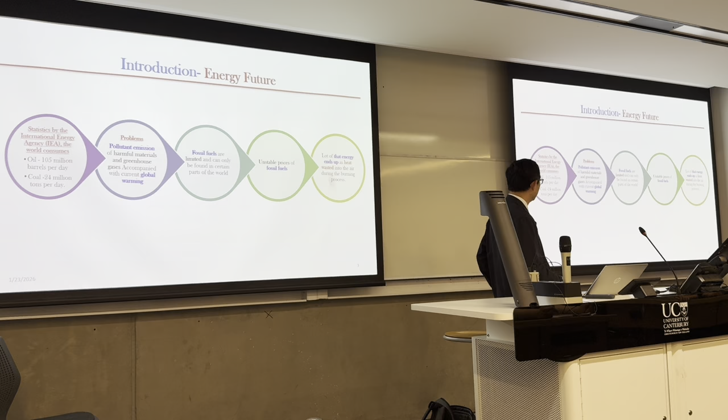So now fossil fuels are limited. How can we find new energy? There's also the unstable price of fossil fuels, and a lot of energy ends up wasted as heat, contributing to global warming. So during this period of time, how can we find future energy?

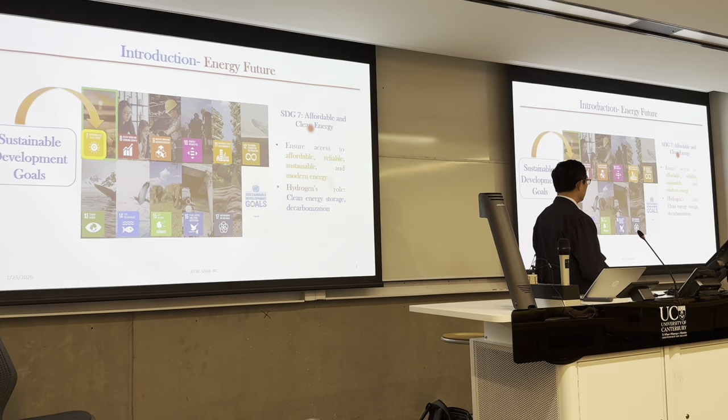As you know, the Sustainable Development Goals—SDG 7—should be affordable and clean energy. Not only clean energy, but also affordable, not very expensive, so we can afford such new clean energy. This goal ensures access to affordable, reliable, sustainable, and modern energy.

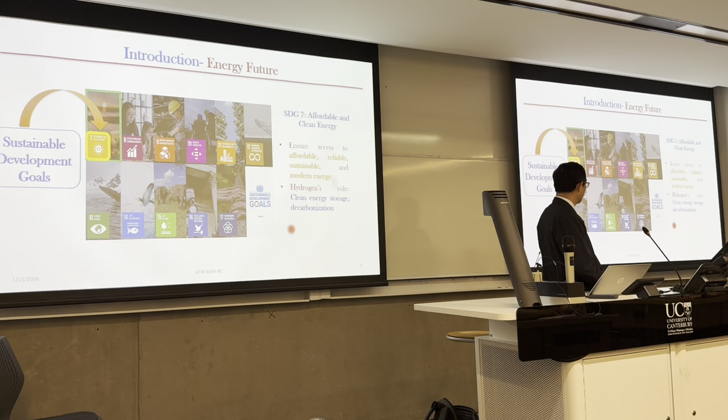So hydrogen is one of the best choices. Hydrogen is clean energy storage, and also enables decarbonization through hydrogen energy.

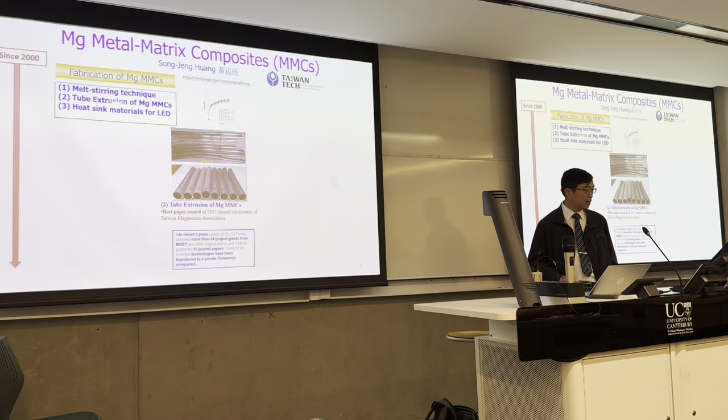Actually, from my PhD research, I did a lot of metal matrix composite materials, basically based on magnesium metal matrix composite. We can melt those and make composite material by melt stirring technique. We can also make extrusion of magnesium alloy to make tubes for bike and scooter joints. We also did some heat sink material from magnesium metal matrix composite materials.

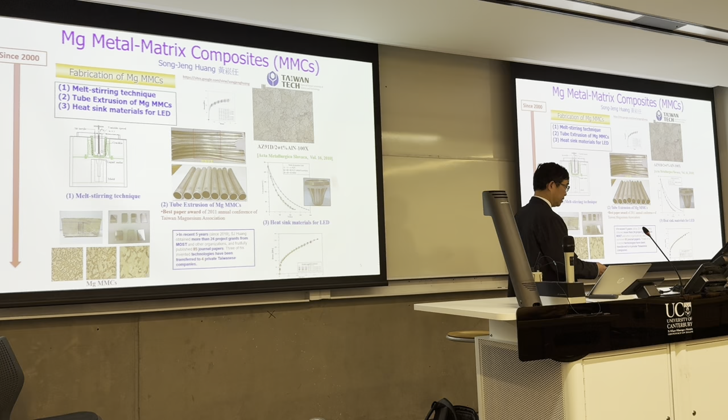That was about 20 years ago when I started this research. I studied in Russia, where we have a special processing technique called ECAP—Equal Channel Angular Pressing—that can make the material tougher and with more strength through this process.

Besides studying metal matrix composite materials, we also synthesized tungsten disulfide nanotubes, which can enhance the properties of metal matrix composite material. From this research, we also filed some patents and licensed them to industrial companies.

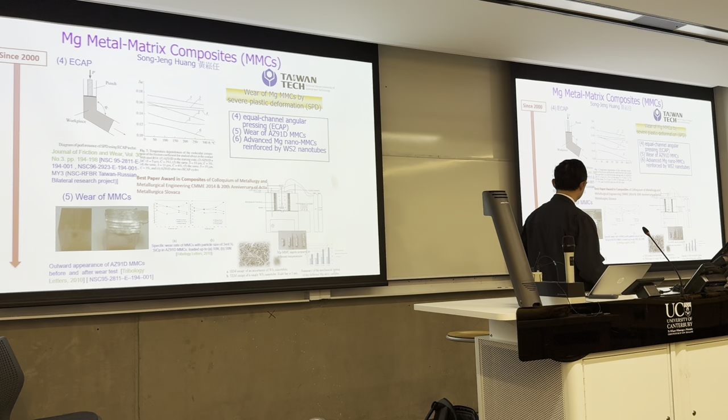It was 12 years ago when I visited Israel's Weizmann Institute of Science. I started thinking about how I could apply magnesium metal matrix composite material to storage, especially hydrogen storage. We also studied some micro-arc oxidation, especially for magnesium alloy.

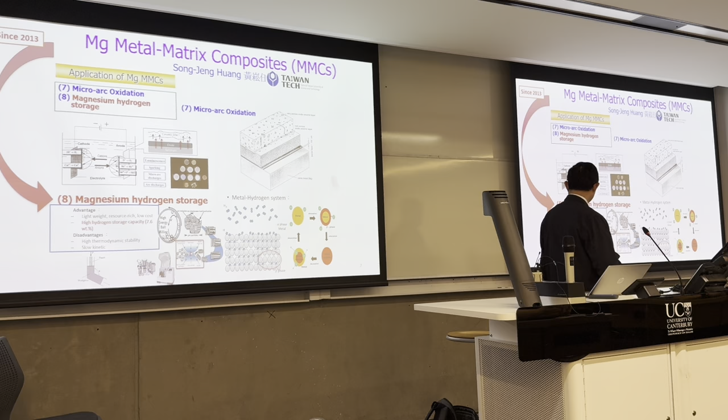So why do we focus on magnesium hydrogen storage? Because it's very interesting—magnesium is lightweight, very light, and also resource-rich, low cost. More interesting is that it has the highest storage capacity, 7.6%, the highest among all metal elements. But it has the disadvantage of high thermodynamic stability and slow kinetics. So we need to overcome every disadvantage of these materials.

Why do we use hydrogen and magnesium as a hydrogen carrier for storage? Actually, hydrogen is the simplest and most abundant element, as you know. Magnesium is also abundant on earth, and hydrogen is also a very abundant element. So it's an energy carrier, not an energy source, but an energy carrier—we can deliver and store more energy.

For example, in Taiwan we have a lot of solar energy and wind energy, but we cannot keep the solar energy for a long time—we cannot save it. But if we transfer such electricity to produce hydrogen, we can store the hydrogen for a long time—1 week, 1 month, 1 year. Then when we want to use that energy, we can transfer the hydrogen back to electricity. So hydrogen is a very good energy carrier.

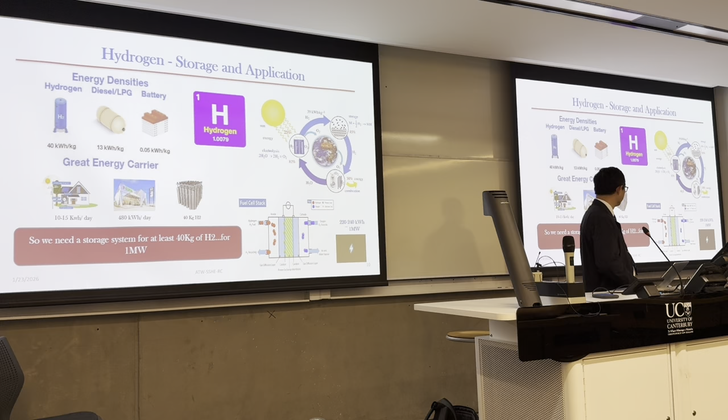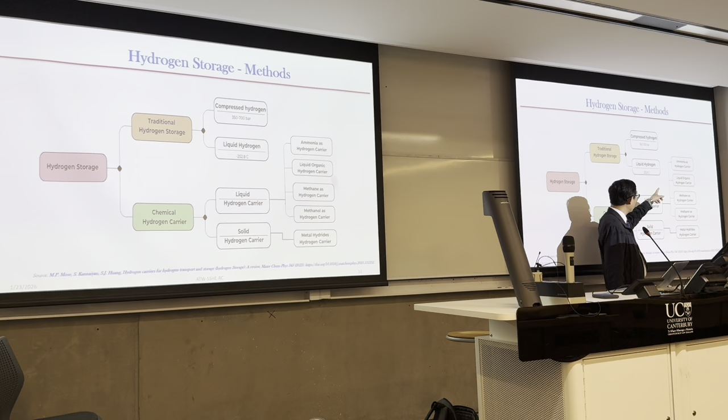Another category of storage method is chemical hydrogen carrier. One kind of chemical carrier is liquid - for example ammonia as the hydrogen carrier, or liquid organic hydrogen carrier, or methane, methanol as a hydrogen carrier, and solid hydrogen carriers such as metal hydrides.

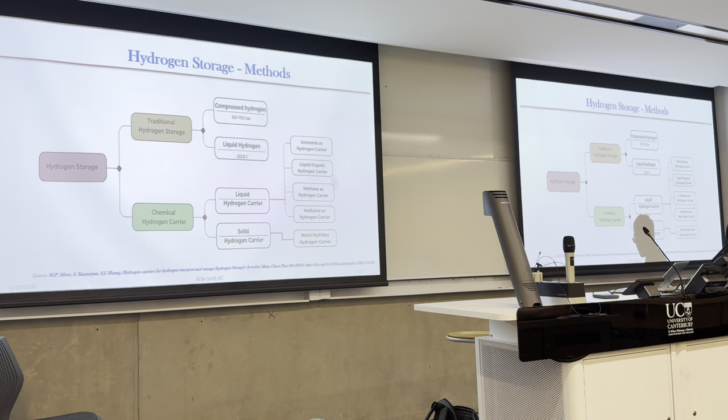It's about 17.6, then methane, and then methanol. For volumetric energy density, methanol has the largest, 15.5. And for carbon content, ammonia has zero carbon content, but methanol and methane have large carbon content.

So most of them are not emission free - they all have emissions.

Ammonia as a hydrogen carrier - you can see we need to store the ammonia, then crack the ammonia, and then also purify it. A lot of process, but this can be merged into the ammonia transportation system already in place in every country - many ports can use ammonia as a hydrogen carrier.

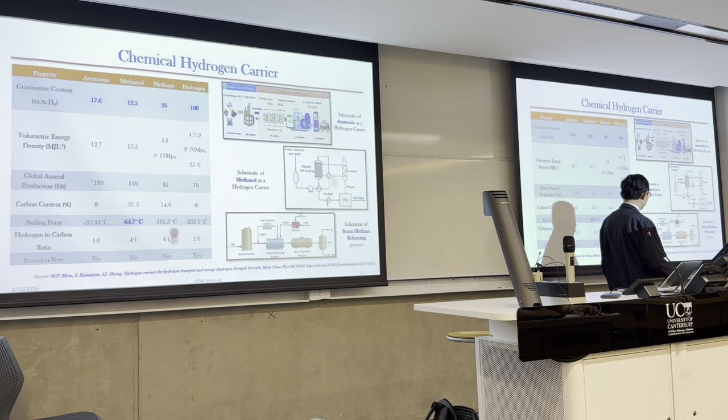Methanol can also be used as a carrier, but we need heating, cooling, and PSA processes. And the most modern one is steam methane reforming - reforming is a more advanced process.

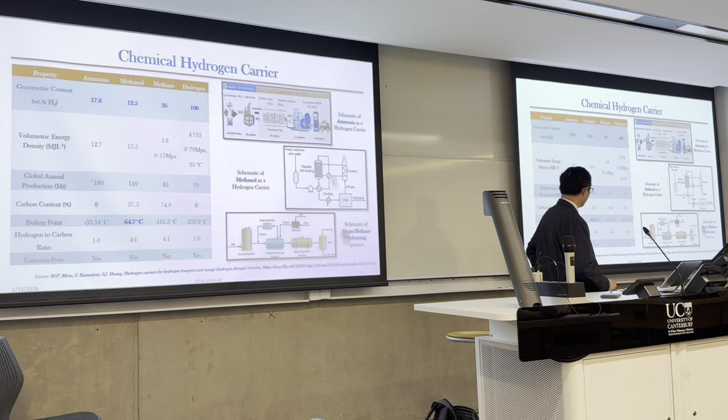But compressed gas has the problem of safety, and also the cost of pressurization - that's the disadvantage. Cryogenic hydrogen has huge thermal loss, and the charge of liquefaction. But metal hydride has few drawbacks, and also a big volumetric hydrogen capacity.

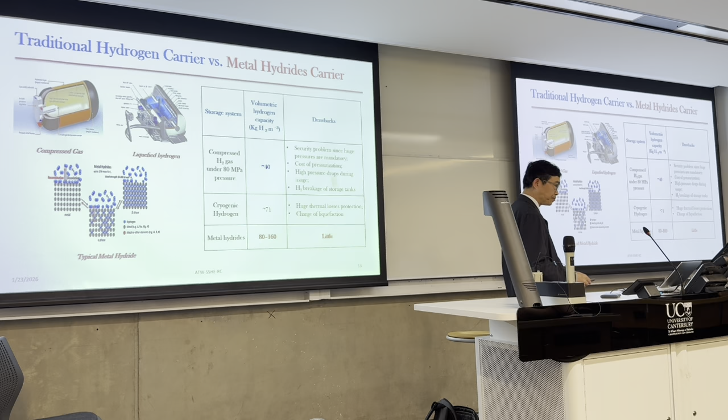In our study, why did we choose magnesium as the metal hydride? First, there's no storage efficiency loss under 4,000 or 5,000 times of absorption-desorption. Also, the absorption-desorption kinetics is faster for the magnesium alloy. And the gravimetric capacity of synthesized materials can be above 6%.

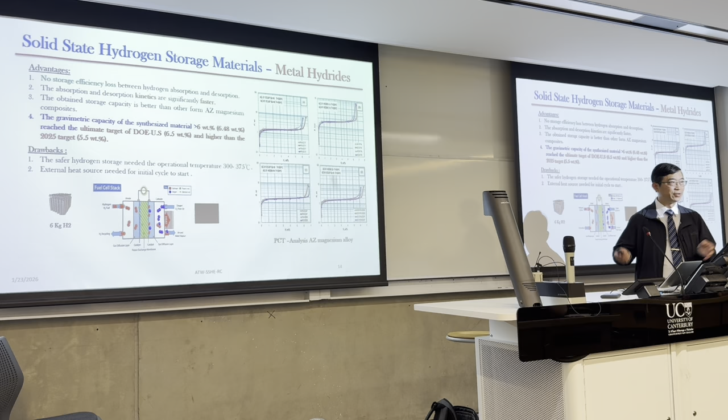The USA Department of Energy has a 2025 target for storage percentage of 5.5, and the ultimate final target is 6.5. But now we can reach 6%, even 7%, in the laboratory. Laboratory is one case, industry is another case. In the laboratory I can reach 6%, but in industry probably only 5.5.

But there's a drawback with magnesium metal hydride - first, the operation temperature is very high, 300 degrees Celsius or 375.

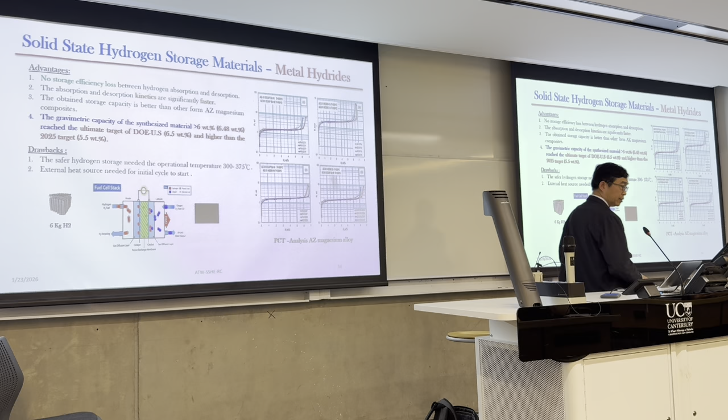Another drawback is the external heat source needed for the initial cycle to start. But we need to overcome those two drawbacks in order to industrialize in the company.

In our research, there are some parameters we need to study. First, gravimetric capacity. Second, thermodynamics. Third, reversibility. Fourth, the cycling. And what we need to overcome is operation temperature.

The key factor that we need to study is the microstructure of the material, and also modification, nano sizing, and catalyst addition.

You can see the storage tank for the gasified, compressed gas tank — you have such a big size. But liquidized is smaller, and metallized, metal hydride, is much smaller. But we can reach the largest capacity, that is 7.6%, theoretically.

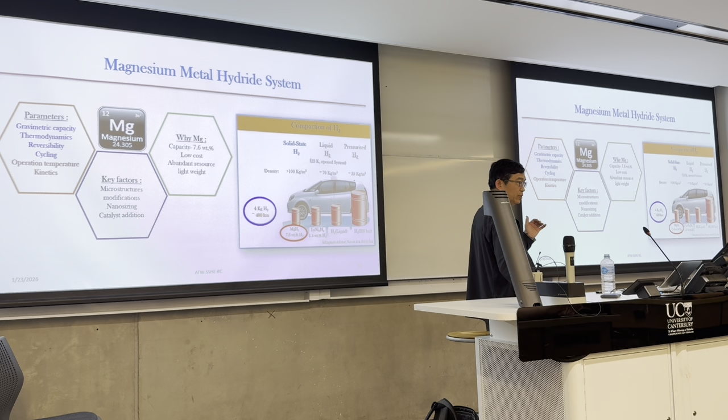But usually in industry, we just can reach 5.5 or 6%. For 4 kilograms of hydrogen, we can run 400 kilometers.

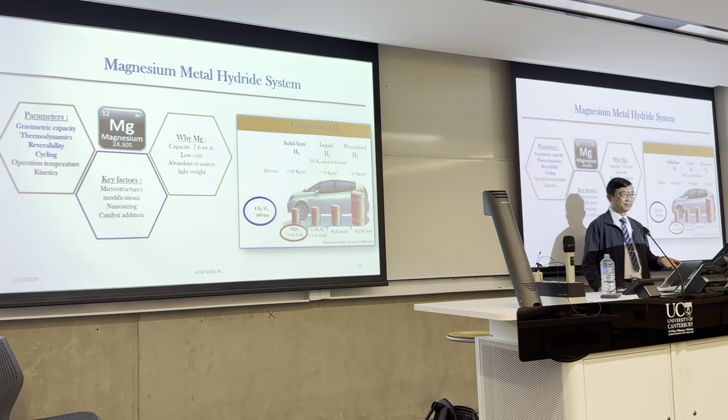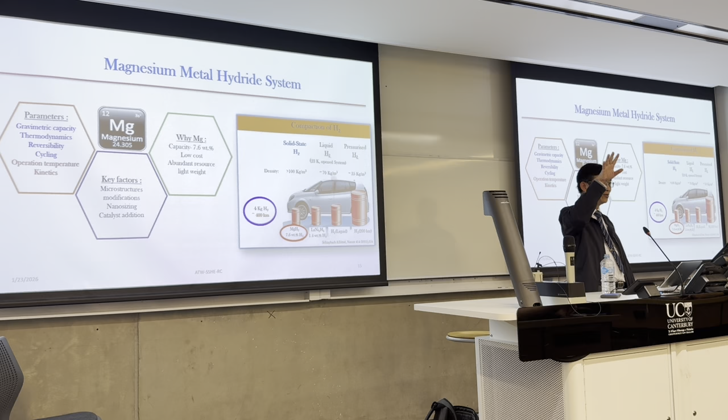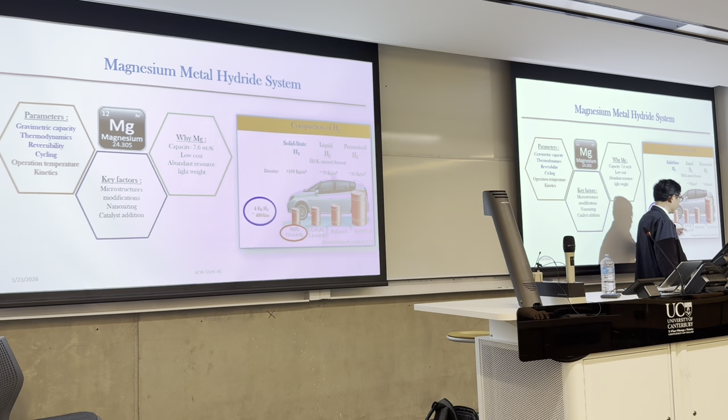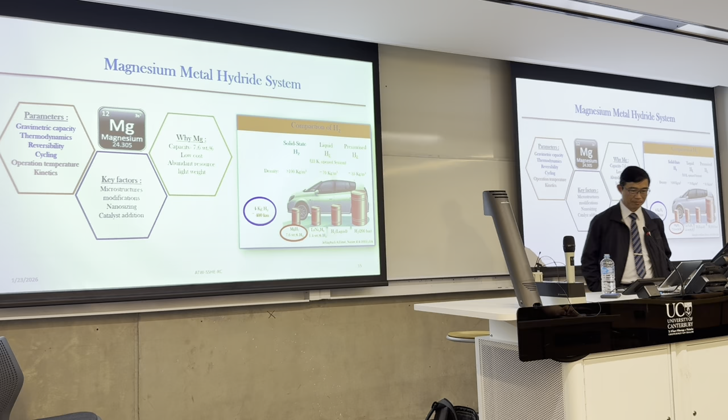It's similar to the electrical vehicle. But if we can store 10 kilograms of hydrogen, it can run 1,000 kilometers. For example, today we went to the mountain but were worried about shortage of electricity, because one charge just runs 400 kilometers. But if we use a bigger storage of hydrogen, 1,000 kilometers should be okay for one charge.

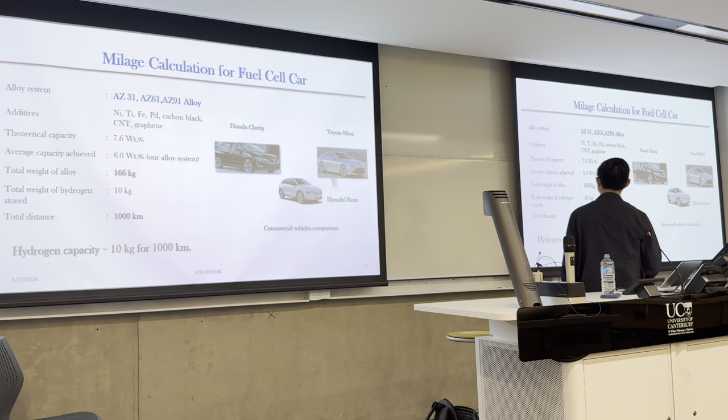In our study, what we put first is the alloy — magnesium alloy AZ31, 61, 91. It's the typical engineering magnesium alloy, which is much cheaper than pure magnesium. So we use the cheaper magnesium alloy.

And what are the additives? Titanium, nickel, iron, palladium, and carbon black, CNT, graphene. And our capacity, we already reached 6%.

If we have 166 kilograms of storage material, we can store 10 kilograms of hydrogen, and then the car can run 1,000 kilometers. So now our first goal in industry is to store 10 kilograms of hydrogen. Then the Mirai or Nexo, Hyundai, can run 1,000 kilometers.

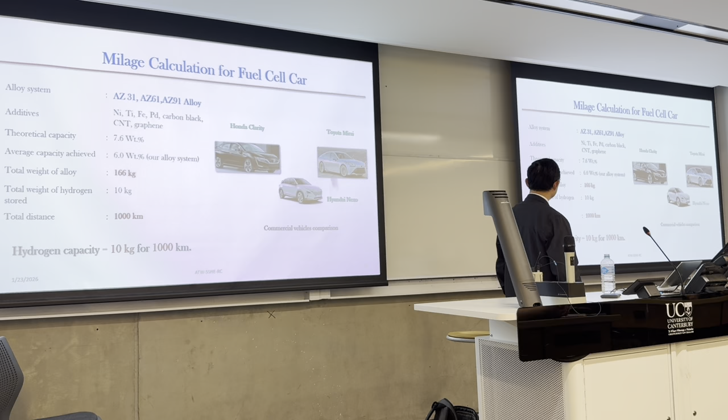How do we make such a storage material? First, we cast the material from the alloy. We put some additives, and then we sample them into the billet. And there's a special process, that is ECAP.

It's one kind of severe plastic deformation method, equal channel angular pressing. Also, we put the powder into the high energy ball milling machine to make the powder. Then we mix them together and put it into the hydrogen storage stack.

The chemical reaction of the storage is very simple: magnesium plus hydrogen forms magnesium hydride. But besides that, there's one or two intermetallic materials. One is Mg17Al12. Another one is Mg2Al3. There are two kinds of intermetallic materials formed in the alloy.

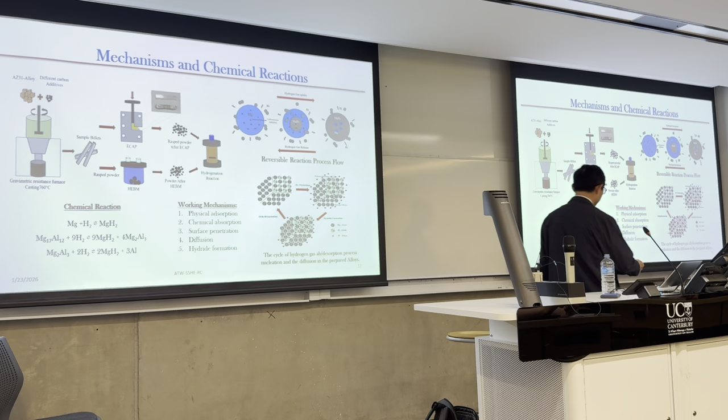So that is our studied research result. We have many kinds of additives — for example, nickel. If we use nickel with magnesium alloy AZ31, we can reach the highest capacity, that is 7%. I think now in academia that is the highest capacity of storage, 7%.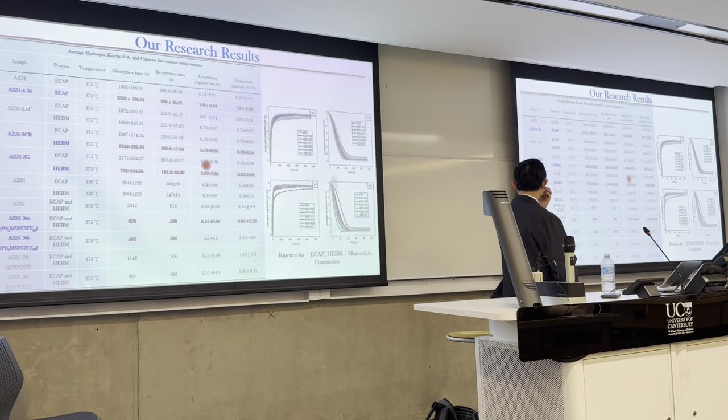But the kinetics are not so quick — it takes 40 minutes to absorb the hydrogen. If we use carbon material, for example carbon black or graphene, the kinetics can be quicker, probably only 20 minutes to absorb. The capacity decreases a little bit, but it's still high, 6.8 or 6.7.

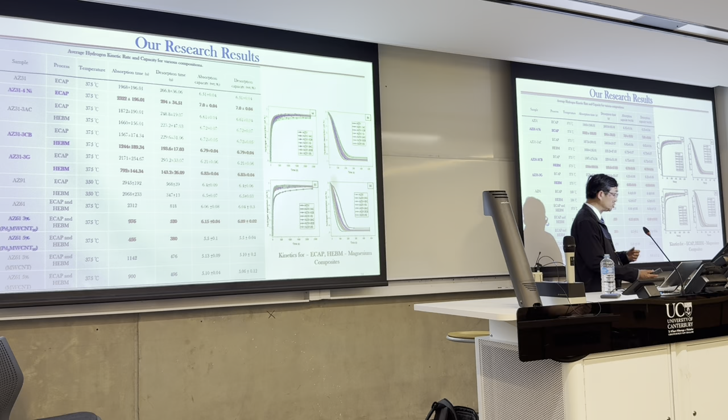Recently we studied palladium material with multi-wall CNT, and the kinetics became very quick — about 15 or 9 minutes to absorb, and desorption about 10 minutes or just 6 minutes. The capacity is about 7.1, 7.15 — still quite high, with improved kinetics.

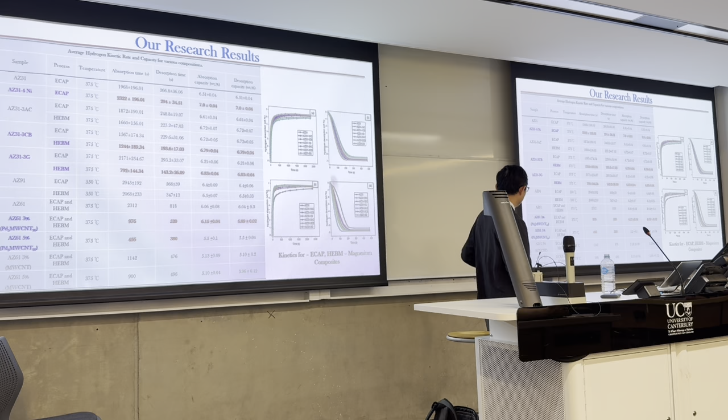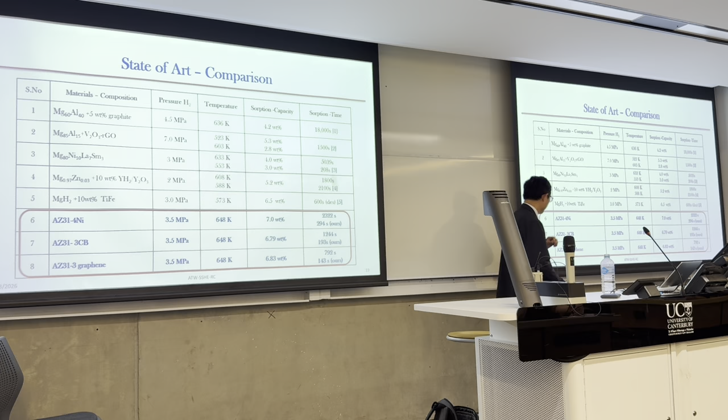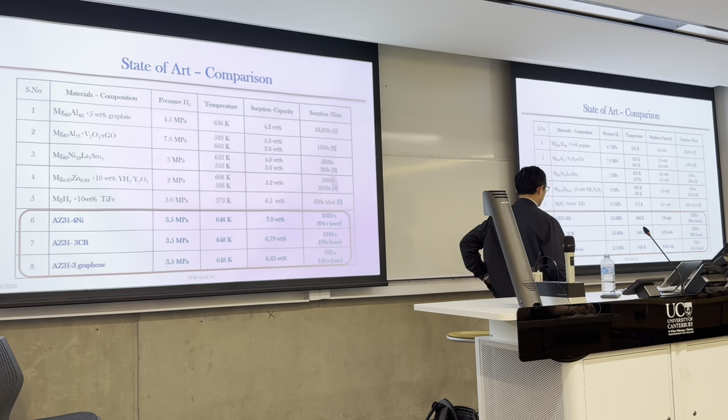But how can we implement such a material in industry? The material should be cheaper. If we use palladium and CNT, that is much more expensive. But if we just use AZ31 with carbon black, that is very cheap. So when we commercialize, we use much cheaper materials, but it still can reach a very high storage capacity, 6.79.

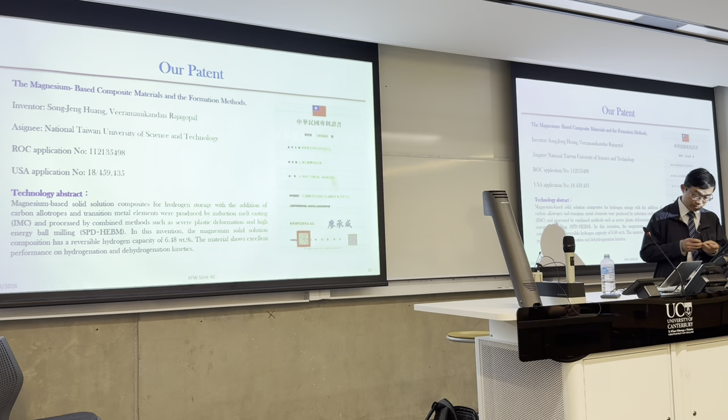We already studied such storage material for more than 10 years. But just 2 years ago, I found our capacity and performance to be very excellent. Why did I not apply for the patent earlier? So just 2 years ago, I filed a patent.

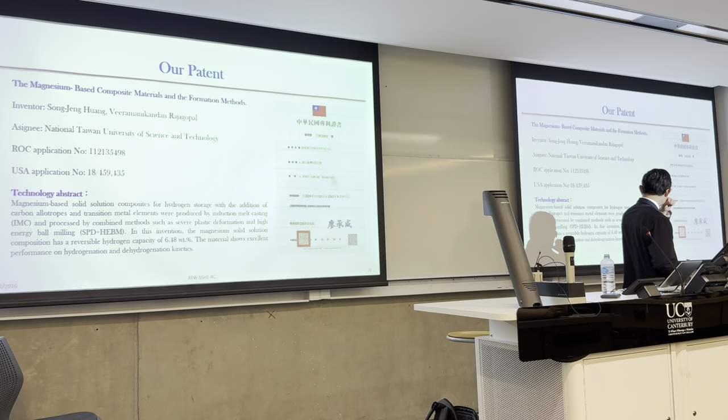Before my patent was approved, one company wanted to collaborate with me because they found this patent very powerful and commercializable. After they signed an agreement with me, I got the patent — but this is a Taiwanese patent. Now we're applying for patents in many countries. Our patent also won the Silver Medal Award in the Taiwan Innotech Expo Invention Competition last year.

And what's our goal? Our goal is the SDG. Hydrogen can contribute to sustainability, and our action is to support hydrogen technology.

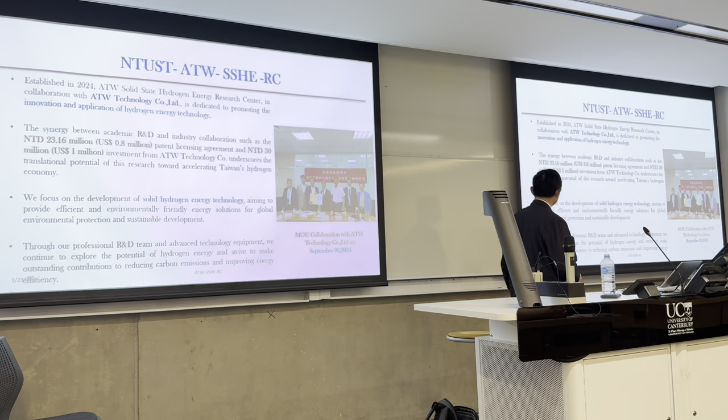Solid state hydrogen energy research center founded. And then we signed an MOU. Then we licensed one patent for $0.8 million. One patent, the patent I showed you. And then the company gave one grant for industrial collaboration, one project, $1 million. Now we're still working on it. We commercialize our technology.

We signed the MOU with ATW Technology Company on September 3rd, 2024. And in our research center, not only me, there are 12 or 13 professors working together. We divide them into 6 groups. Hydrogen production division, and there are 3 Indian professors in our research center.

Also, we have the hydrogen storage division, with a professor from National Taiwan University and a professor from Taiwan Tech, my former PhD student, now an assistant professor in our university. Also the fuel cell division, with professors from other universities, the sensor division from two other universities, and the material recycling division, a professor from Taiwan Tech. We have a project manager, 4 PhD students and 4 master students working in this project.

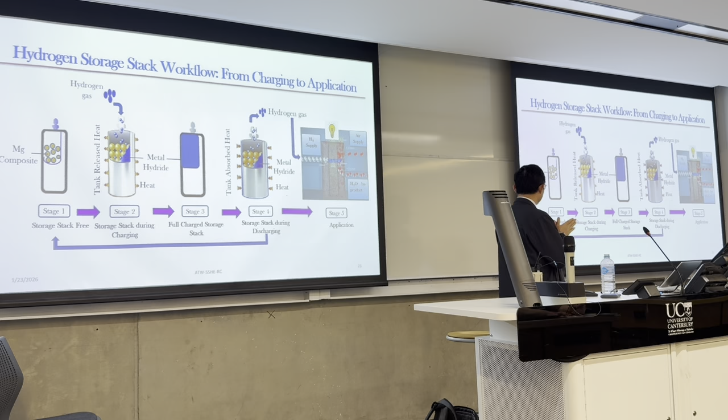So, our storage stack workflow is: first we synthesize the materials, then we store the materials in our storage stack, fully charge the storage stack, and connect it to the fuel cells to produce electricity.

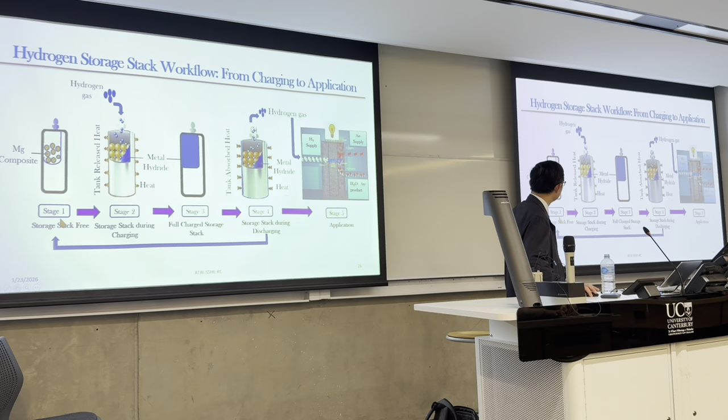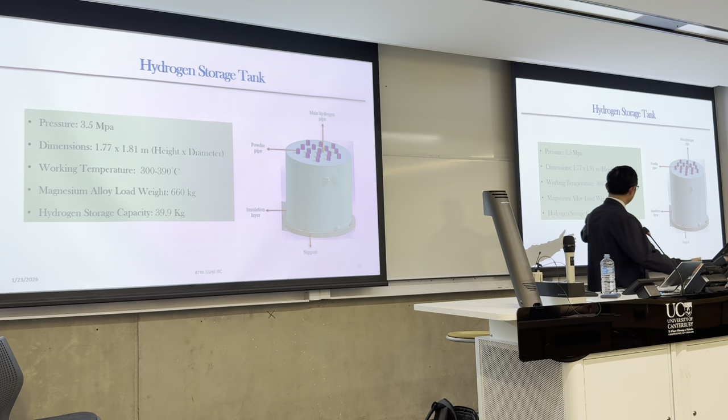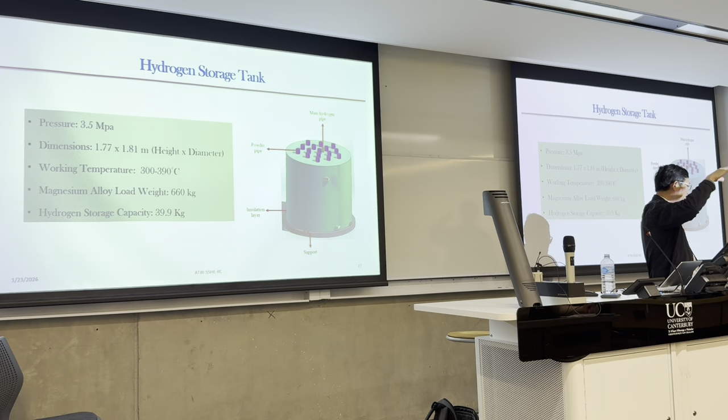That is our hydrogen storage tank. Now we are making a very big storage tank which can contain about 40 kilograms of hydrogen. But actually this tank is not so big, about 1.8 meters in height and about 2 meters in diameter. So we can store 40 kilograms of hydrogen, but our materials weigh about 660 kilograms.

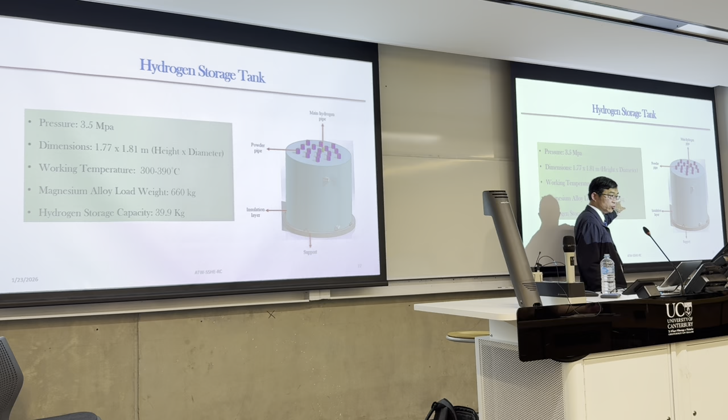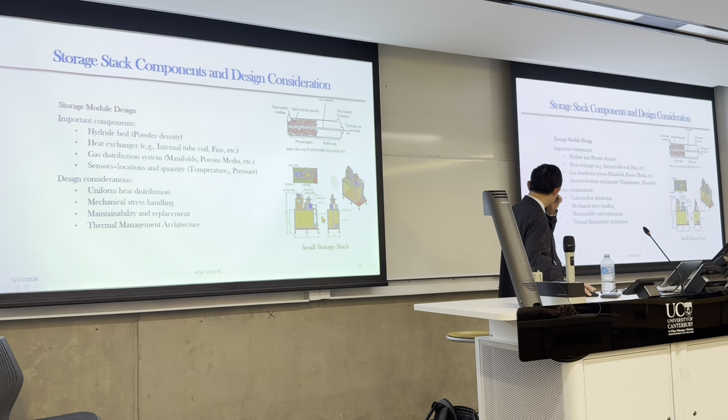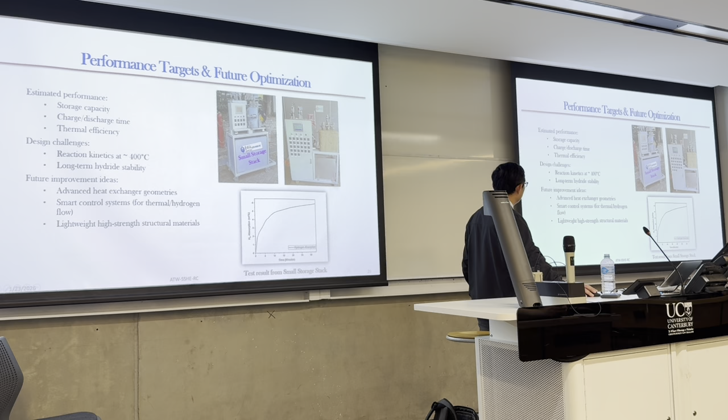We have a small storage stack already produced. It can store about 0.6 kilograms. It's a small one, our prototype of the small stack. This is a storage tank. We have first generation, second generation, now already third generation.

Okay, so our ATW solid state hydrogen energy research center stands in the middle of the stream. Upstream is hydrogen production from renewable energy, from steam, from many methods. We store the hydrogen and provide it for fuel cells, with applications in mobility or industrial electricity usage. We can also have energy storage from the hydrogen storage.

In conclusion, over 20 years of experience in magnesium composite materials is my main research, and about 12 years ago I shifted the application of my research to hydrogen storage, which I studied at the Weizmann Institute of Science, Israel. Then I continued steadfastly visiting companies. Almost every week I went to companies to discuss what problems they have and what new products they want to invest in. In Taiwan there are a lot of energy, mechanical and chemical companies. I want to commercialize my research for industry.